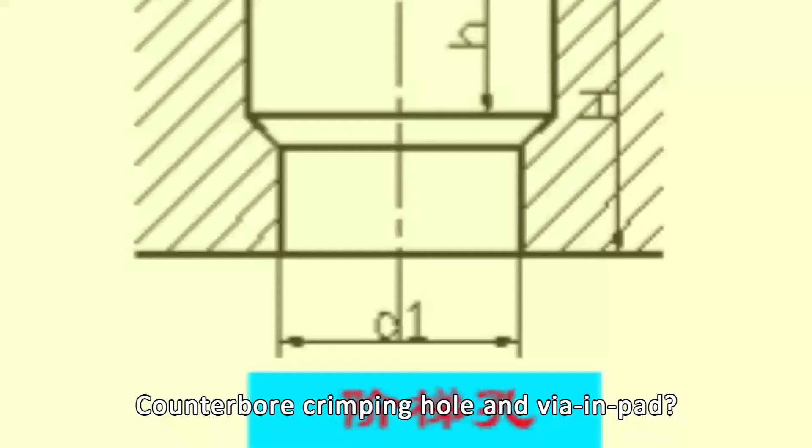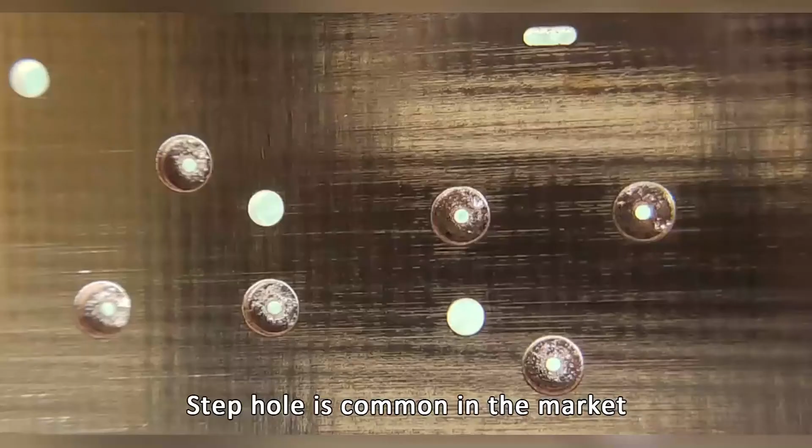A stepped hole, also known as a step hole, is generally produced through a drilling process. First, drill a through hole with a drill bit, then drill a half-through hole. The board can't be drilled through when the large drill bit is used. The step hole common in the market today has an angle between 100 and 160 degrees, sometimes up to 180 degrees. It is mainly used for welding and fixing some professional parts.

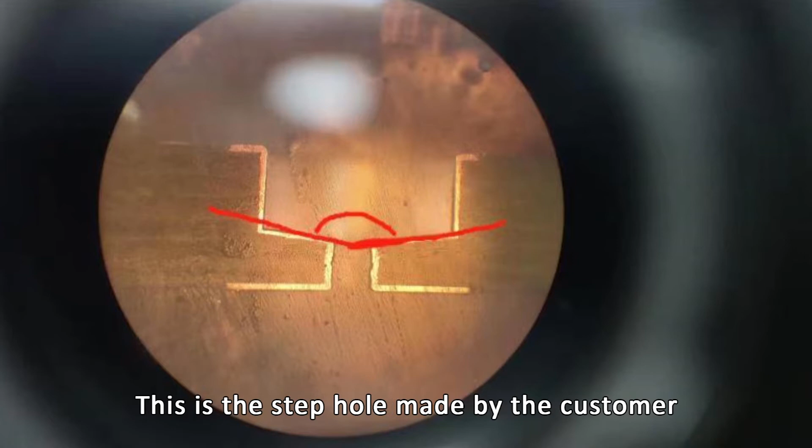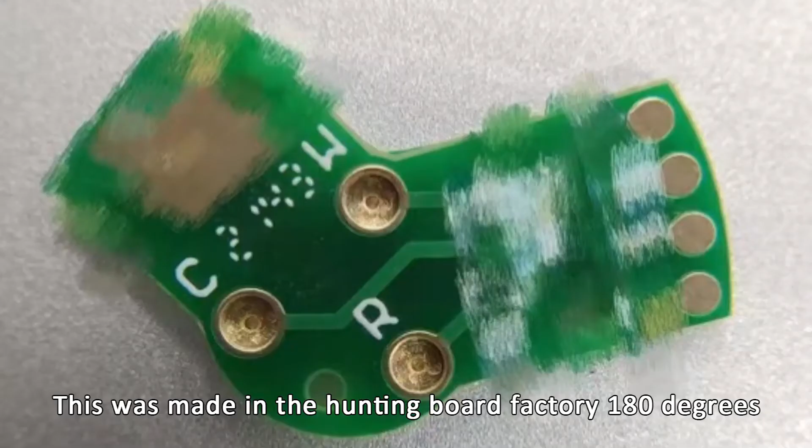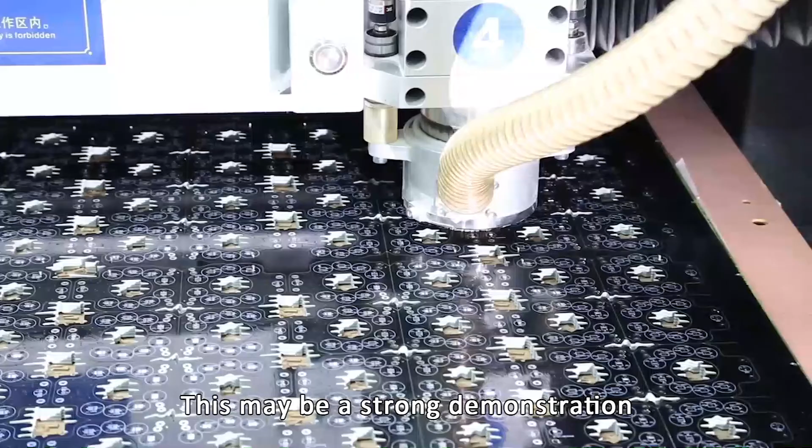Currently, PCBBUY's new technology can also process stepped holes. This step hole was made by the customer at another factory before, with the angle controlled at about 170 degrees. This one was made in our factory, at 180 degrees, which is what the customer wanted. He came to us because other factories couldn't achieve what he wanted. Although the difference is only 10 degrees, controlling the accuracy of the process is very strict. This may be a strong demonstration of the strength of our factory.

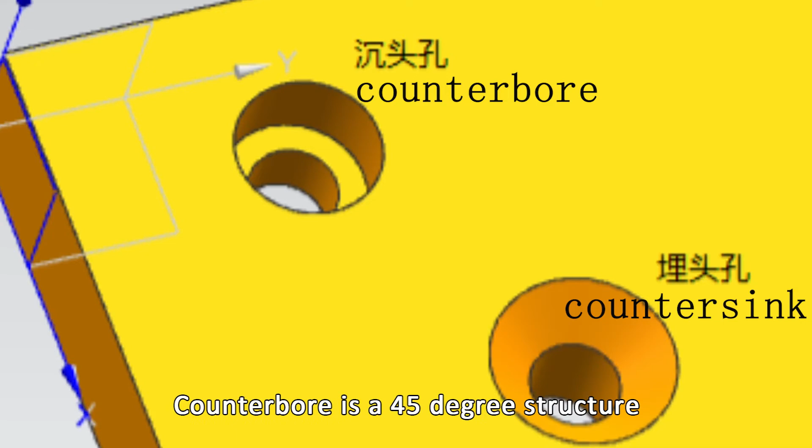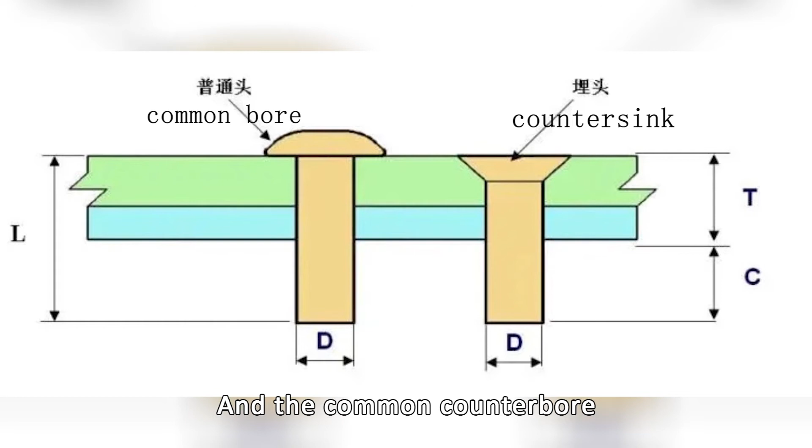Counterbore is generally produced in the appearance process, using a gong machine to form the shape of the desired hole, and the hole wall is copper-free. Counterbore subdivision is also called counterbore hole, or funnel hole. The difference between a counterbore and a countersink lies in the reaming of the upper part of the bolt hole: a counterbore is a straight tube structure, while a countersink is a 45-degree structure, which is smoother. The upper reaming of the bolt hole can accommodate the bolt head, so that the screw head is not higher than the surrounding surface. The common counterbore in the market is a 90-degree counterbore, mainly used to install screws for ICs or other parts.

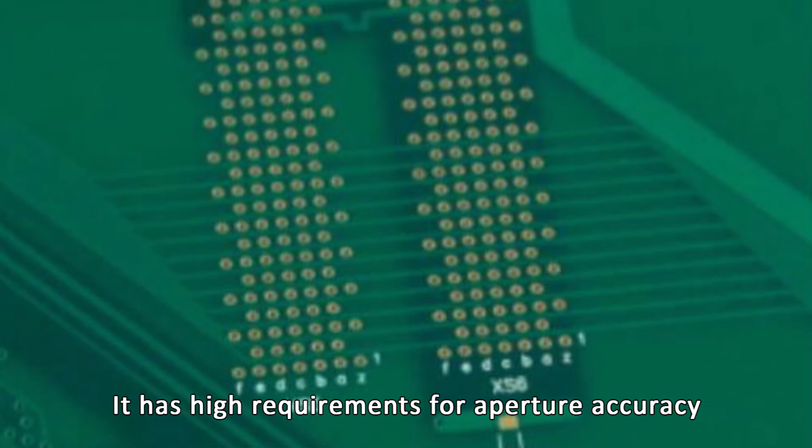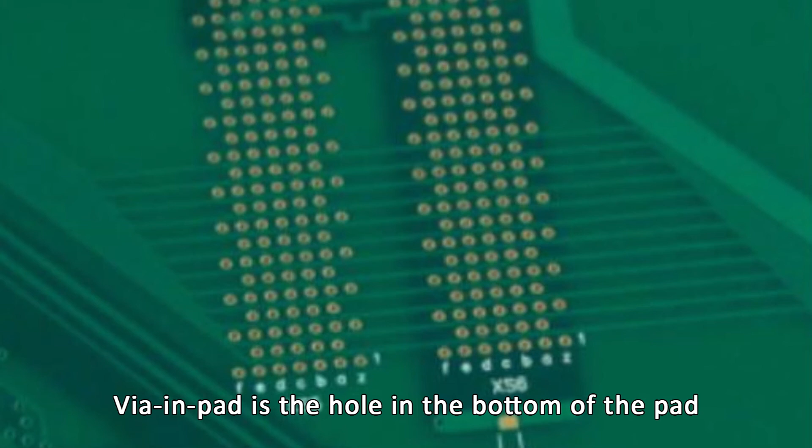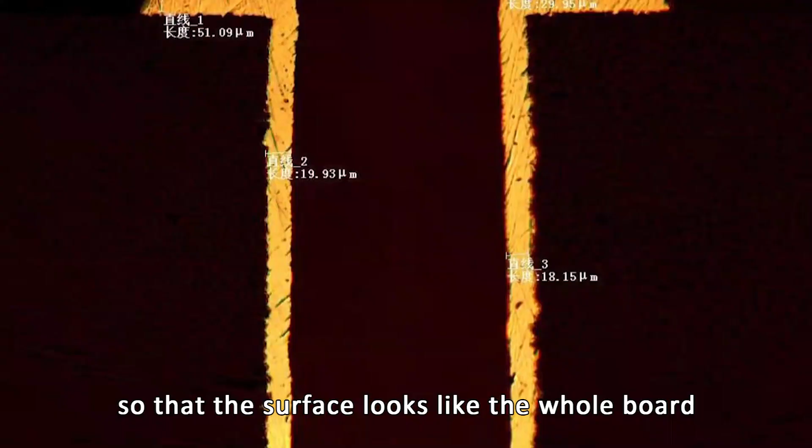A via-in-pad is the hole at the bottom of the pad. Generally, the diameter of the disc hole can't be greater than 0.5 mm. This kind of hole will be resin-plugged, and then a layer of copper is spread in the orifice, so that the surface looks like a big continuous copper surface, with the hole buried at the bottom of the welding pad. The via-in-pad is mainly used for conduction.